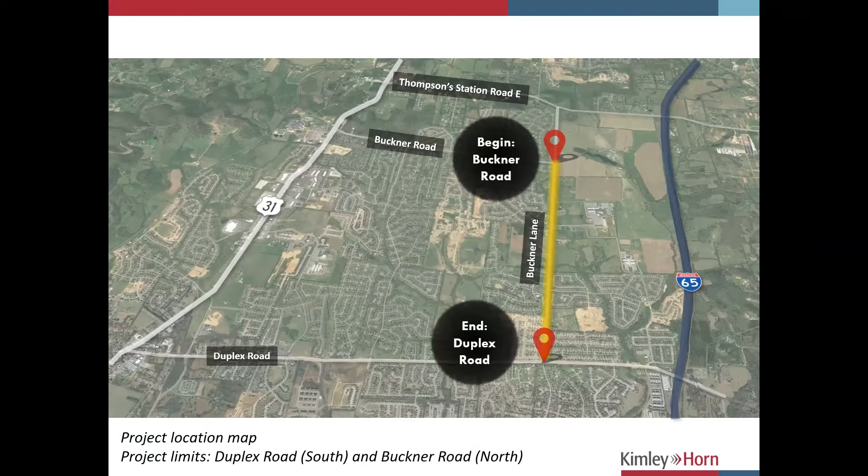We want to focus on this and the right-of-way acquisition process for this area.

The acquisition process is an important part of any project. It's obviously extremely important for you as a property owner — we're dealing with impacts to your property and things that you're accustomed to. You're very curious about how the process is going to go and what actually is being done. It also serves as a vital part of the success of this project as a whole. So the city's goal, our goal, is very simple: we want to be fair and reasonable, and give you a fair and reasonable process that's consistent for all of the property owners.

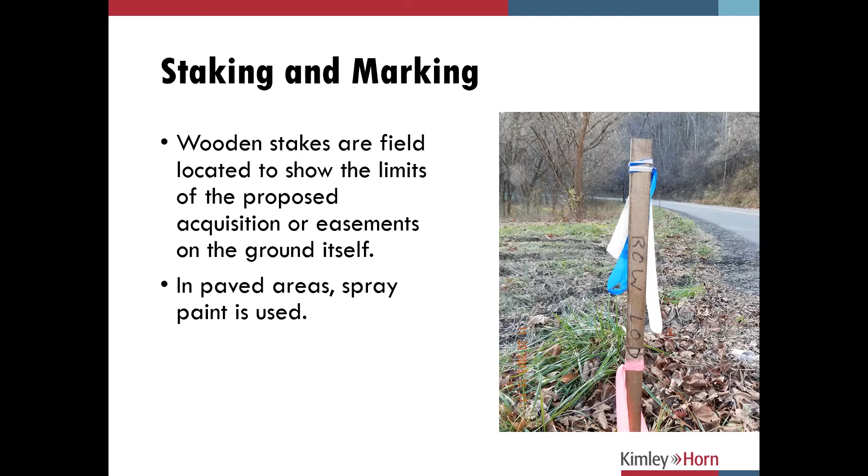These are pretty important to the process itself, so we'd like to ask everybody, please don't pull the stakes or knock them over. They're not just for the appraisers who come out and view the impacts and make their evaluations and estimations, but they're for you as well. They give you a visual guide to the impacts of the project.

So, appraisals. Randy and Adam, independently from the rest of our team, are going to prepare written documentation. This documentation will describe your property, the date of their analysis, and the proposed impacts, and with that they'll estimate a value for each property.

Next in this process, in addition to the appraisal on your property, there's a review appraisal. This is a secondary check that independently verifies the factual information of each property, and also reviews the written report that the appraisers prepare. The review appraiser doesn't develop their own opinion of value for the subject property, but does conclude whether the value estimated by the appraiser is reasonable, credible, and acceptable for making an offer.

This value is based on fair market value. For each acquisition, the appraiser will provide an estimate of fair market value. Simply put, this is the value of the property in its current condition based on comparable sales within your area. As I stated, this process is done independently of the rest of the project team, based on current market data.

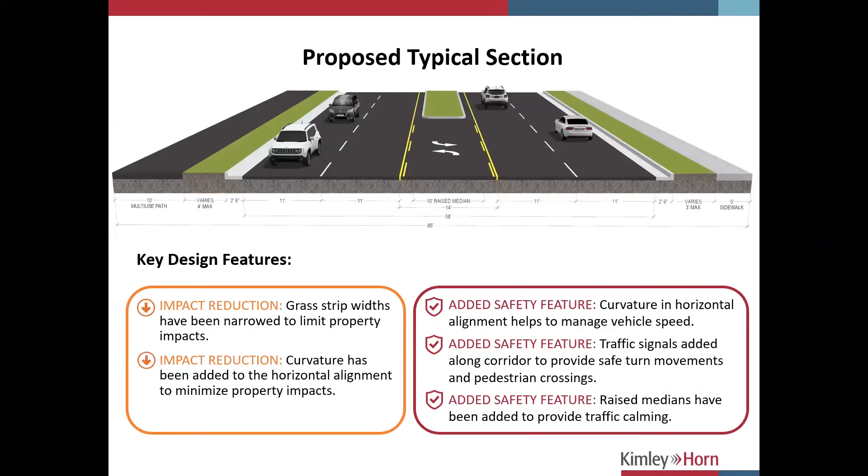So next, we're going to move into the right-of-way layout portion. I don't know, hopefully several of you have been to these meetings before. I think this is our fourth one. Some of this won't be new information or new exhibits, but they help you visualize what the road will look like.

As you know now, it's a 2-lane roadway. In the future, there's going to be 4 through lanes at 11 feet, a 14-foot center turn lane with a raised median in certain locations. Along the west side of the road, there will be a 4-foot grass strip with a 10-foot multi-use path. On the east side, there will be a 3-foot grass strip with a 5-foot sidewalk.

There's some notes here on the bottom about some of the features we've introduced into the project. One of the main components we've talked through in each of these meetings is that one of our main design goals is to limit impacts the best we could. We want to provide you with a safe roadway, and we want to limit the impacts to everyone's properties.

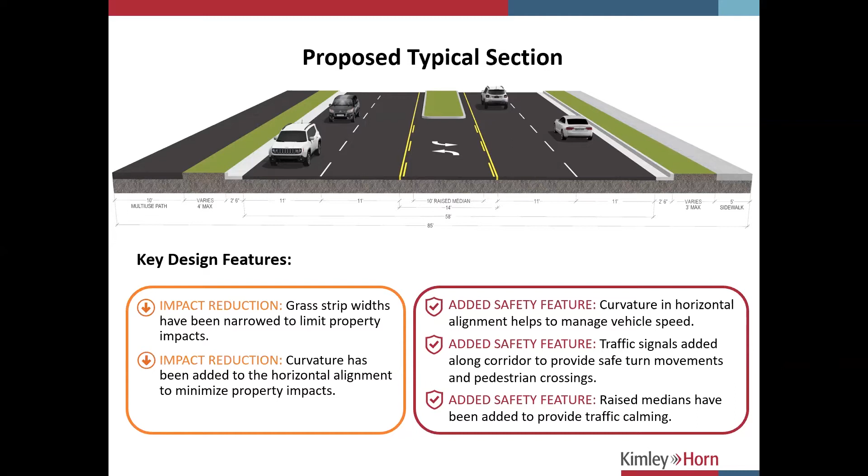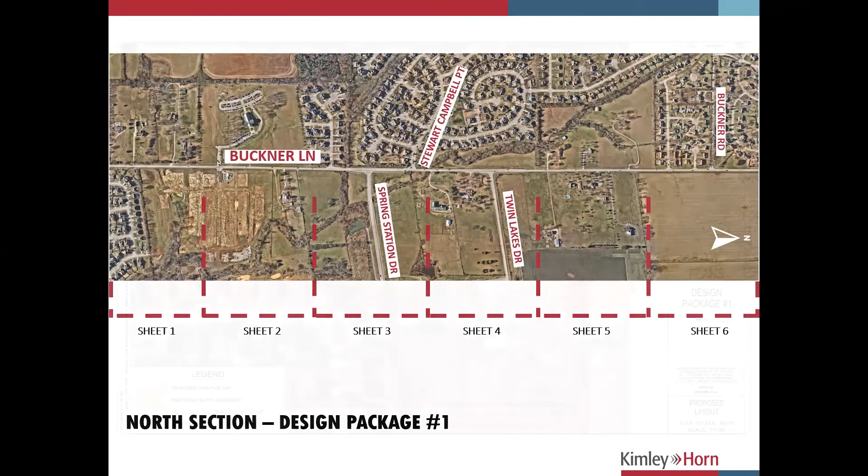These are the exhibits that will be available this week for you all to download. The purpose here is to go over them with you, give you some information on them, how to read them. I know you'll have questions. My contact information will be available at the very end. You can write it down, download this presentation, send me an email, ask me your question, and we'll get it to the right-of-way team or the city to address any issues, concerns, or questions you have.

A couple things to note: the bottom left is the legend, so we'll detail what each of those things means. What we've done with some of the older exhibits is pull in the aerial and some of the existing features from the surveyor, so we've got those in the background. We want to give you a better visual of where these impacts fall in your yard, with landmarks you can use to gauge what the impacts look like, giving you the best idea we can on a 2D piece of paper.

The purple lines you see are parcel lines showing the boundary of each parcel. The purple line running along each side of the road is the existing right-of-way. In red shade, that represents the area of proposed right-of-way needed for this project. Outside of that is a green shade, the slope easement, which represents the width and area needed to tie down the proposed cross slopes and side slopes of the road from the back of the shared use path or sidewalk to tie it back to existing ground.

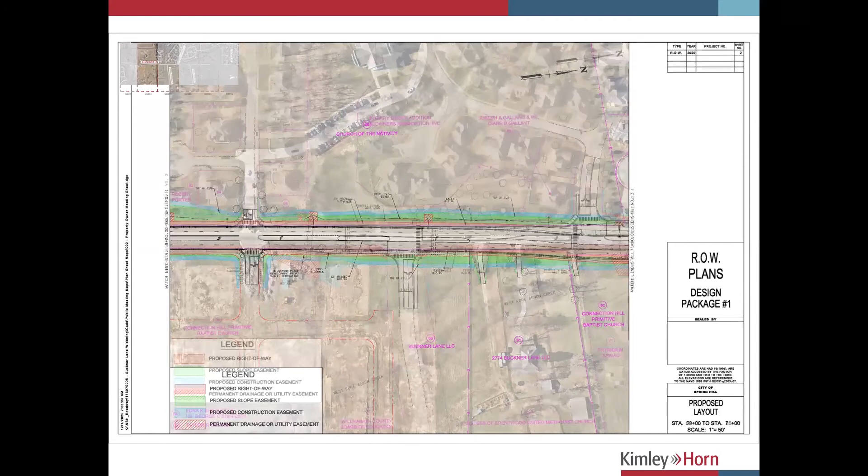I know these are not the best view in this format. Once again, we have to do this virtually, but I'm happy we have the technology to at least sit down and have this conversation. These will be downloadable, and the resolution is good enough where you'll be able to zoom in and really view each of these properties.

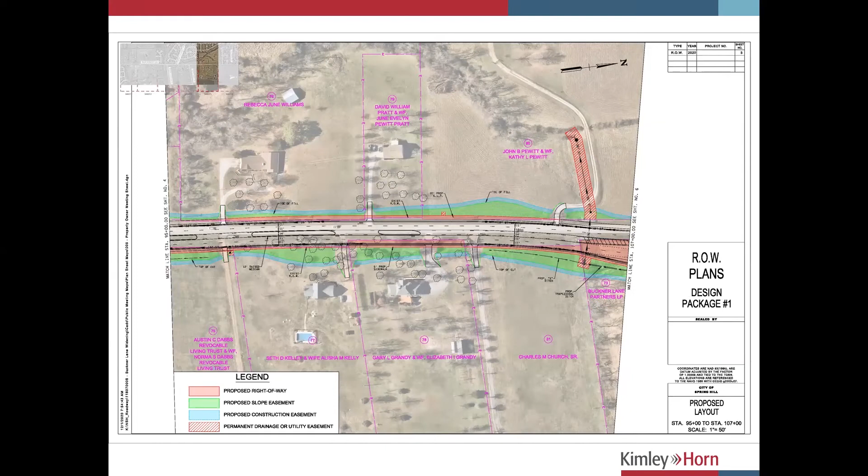You also see toe of fill, which means that the proposed ground is higher than the existing ground, and we're going to need to add height here to the existing ground, and that's shown by a dashed line. You'll be able to see that more clearly at home, but it also kind of gives you a feel for some of these impacts and if it's going to be adding dirt or taking dirt away.

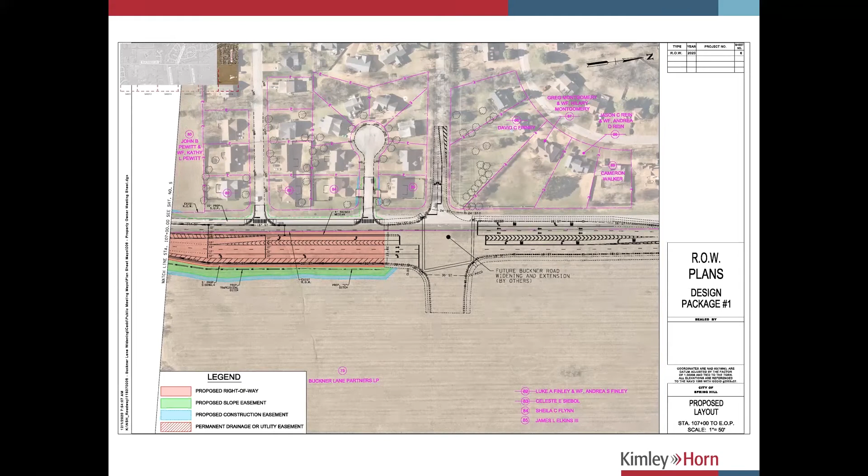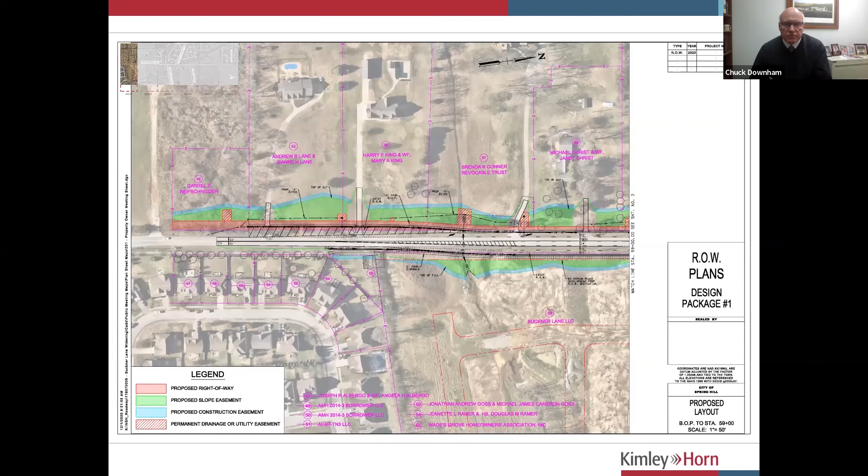Are they asking third map from the north, like from Buckner Road, or from the beginning? Do we know, Kevin? They said from the north, so I would say it's from the beginning, because you started north to south — or did you start? We went south to north. Okay, so it would have been third to last.

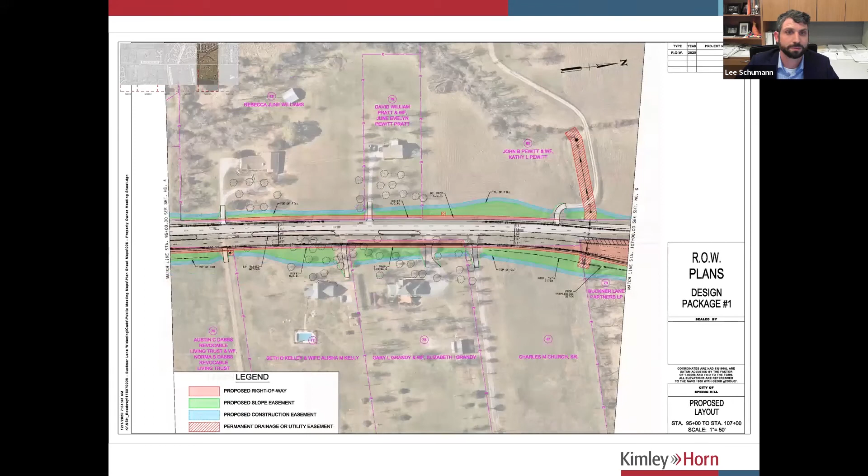All right, so there, one. So...

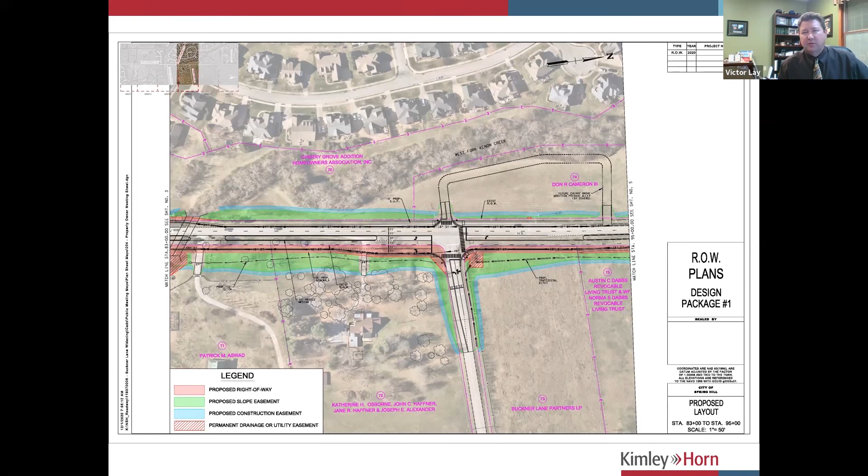Victor, you may want to elaborate a little more on current practice and policy for the city. I don't know that I can elaborate any more—you did a really good job answering that question. I think if there's a particular property the owner has a question about, just reach out to us at City Hall and we can take a look at that individually and give you as clear an answer as possible. Absolutely. Thank you.

Okay, I think we're all caught up. Oh no, I'm sorry, we do have one more question, and it has to do with where do we get the email address to send contact information?

Okay, we are now all caught up. There are no more questions.

Well, as we stated, this is a lot to take in one meeting. Unfortunately, we can't all be together, but we do have lots of technology we can use. So please email, phone call, reach out to us. We want this to be a fair, reasonable, consistent process for all, and I can speak for the team in the city here, we're willing to put the effort in to make sure that happens. So please give us your information, work with us, and we'll do the best we can to answer your questions and concerns.